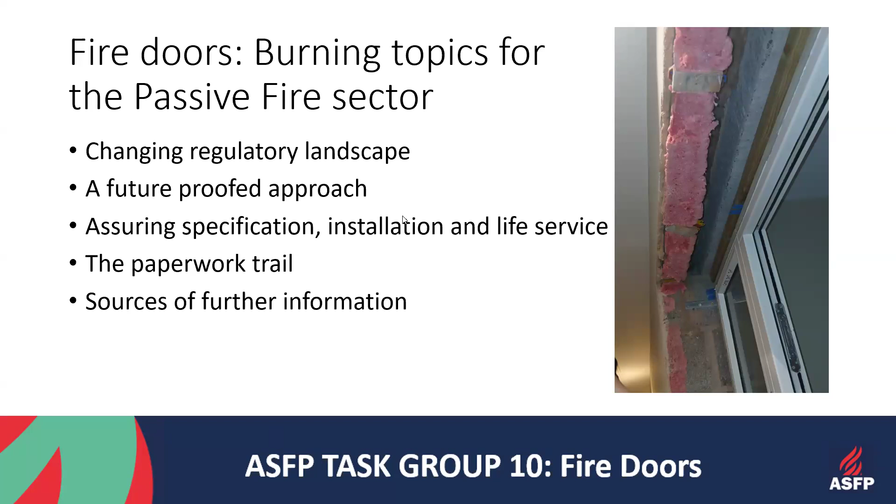And underpinning all of that work, we want to talk about the paperwork trail, the documentation that sits in the background, the due diligence checks that need to be done before any work is embarked upon. Now, I can't possibly tell you everything that I know about fire doors in the next 40 minutes, so I'm hoping to signpost you towards sources of further information that you may find useful to extend your knowledge after this webinar.

So before we get into the detail about fire doors and the passive fire safety sector, let's just take stock of the changing regulatory landscape that we're working within.

Relevant to fire doors is the removal of the national classes in 2029 from Approved Document B in England. We also have the Building Safety Act and the Building Safety Regulator emerging and are expecting secondary legislation later this year. The defined roles and the duties of the clients, the principal designers, the principal contractors and the subcontractors are becoming clearer.

Although fire doors have always been notifiable to building control, there seems to be a reawakening in this sector. And of course, competence seems to be the buzzword. How do we really assess and demonstrate the competence of organisations and operatives working within this sector? And then we have the pull on fire safety information, including information about fire doors within a building. And Regulation 10, the regular inspection of doors in the common areas, including apartment front doors.

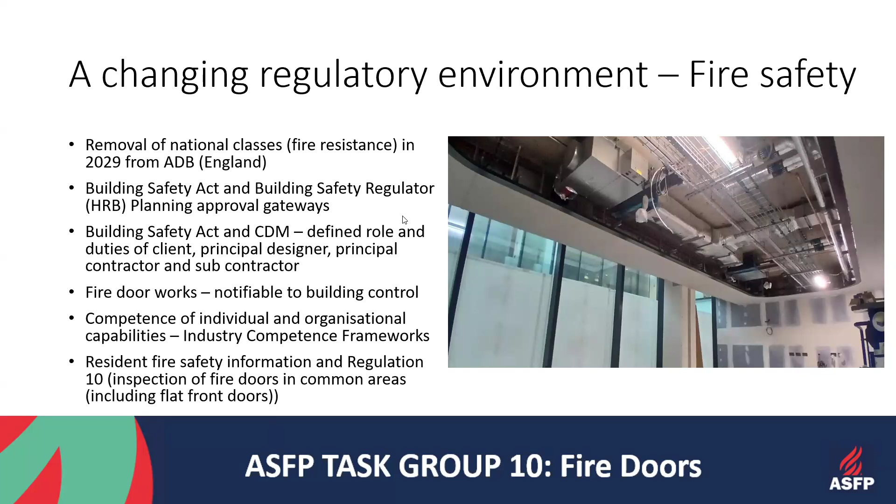Now, I'd just like to show you a simplified graphic of the way that products and information travel through the fire door sector. I'm not going to read my way through this entire slide. You can do that. But really, I'd like to illustrate to you how many different points in the process, how many different stakeholders are involved, and how many different places things can go wrong.

When you start a project and you actually start considering it from the perspective of the audience, the different stakeholders that are going to need access to your decisions, to your work, to your documentation, it's really important to consider all of these different groups and the type of information that they'll need.

And one group I'd like to give an extra special shout out to is the end users, the residents, the visitors, the emergency services that will attend that building throughout its lifetime and keep it safe. They are often a forgotten group when we consider the fire door sector, but they should be first and foremost in our thoughts.

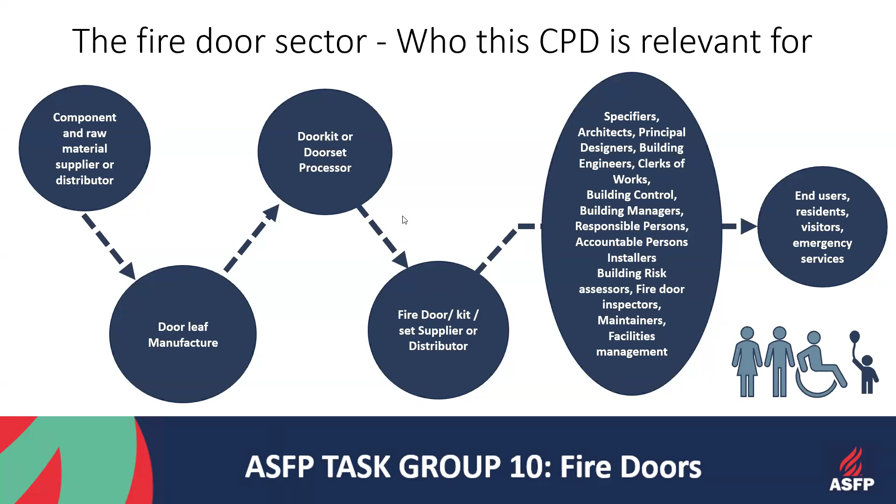Now, what I just showed you was a really simplified view of the fire door sector. Here's a little bit of an image that I did for a specific piece of work some years ago when I was tracing product. Now, there'll be no test on this slide, but I've included it to illustrate to you what a complex and intermingled web the fire door sector is.

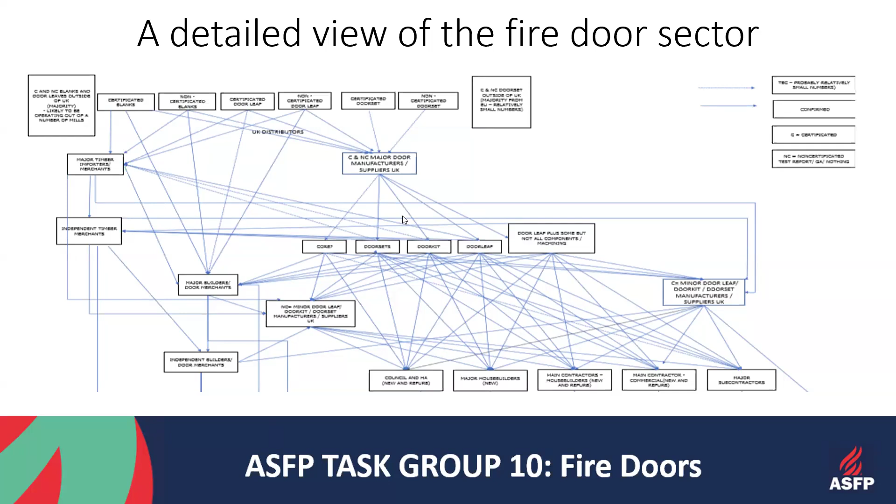Products and components travel in all different directions, with all different sorts of servicing being done to them by all different sorts of stakeholders and at many levels of the chain. When we consider this image and we consider it against the backdrop of documentation that supports a product in its lifetime while it's fitted into a building, we must be considerate of all the different stages that that documentation and product may have passed through before it got to that building.

Much of the information in today's webinar is based around commonly found fire door scenarios in both residential and some commercial settings. I'm talking about some of those more interesting buildings, maybe where we've got mixed use, a mix of retail, for instance, but with sleeping accommodation. I'm starting to add in some aspects here that contribute to the overall risk profile of the building.

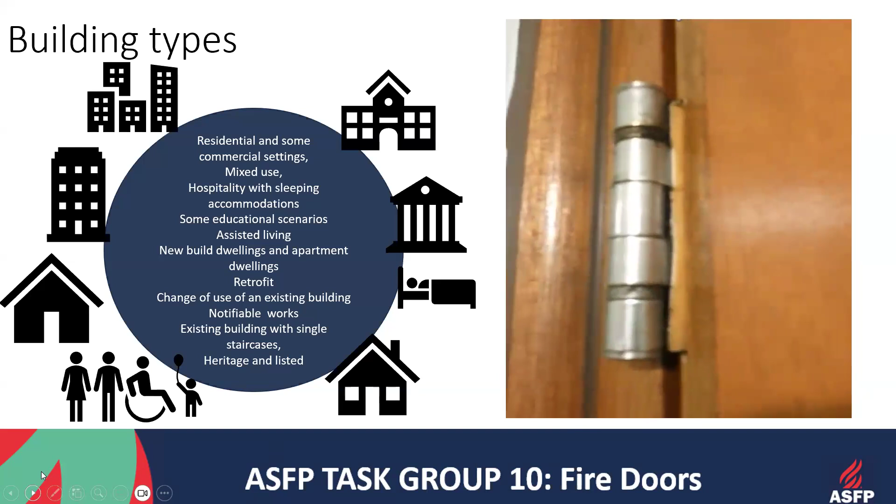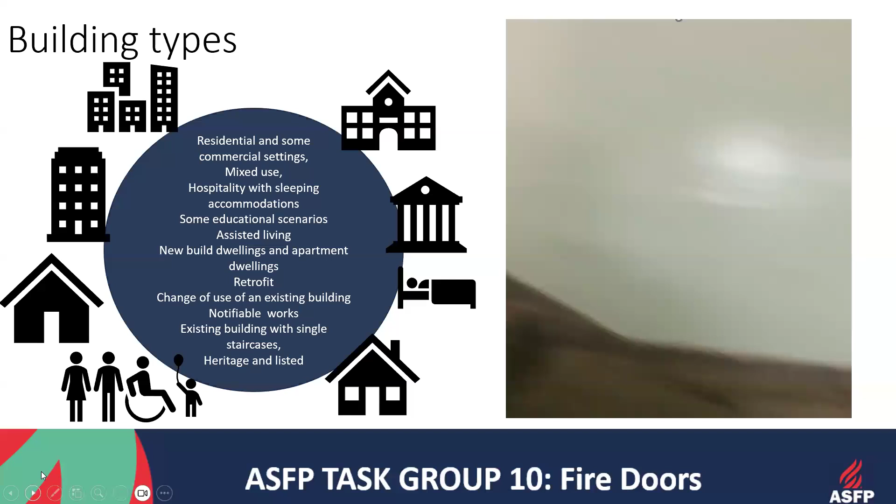Carrying on that theme of sleeping accommodation, we could be thinking about some educational scenarios or assisted living accommodations. It's important to note that the approach in a new building versus an existing building can be completely different. In an existing building, there may be a number of factors that need to be considered over and above the complications that you would deal with if you were just working in a new build type property.

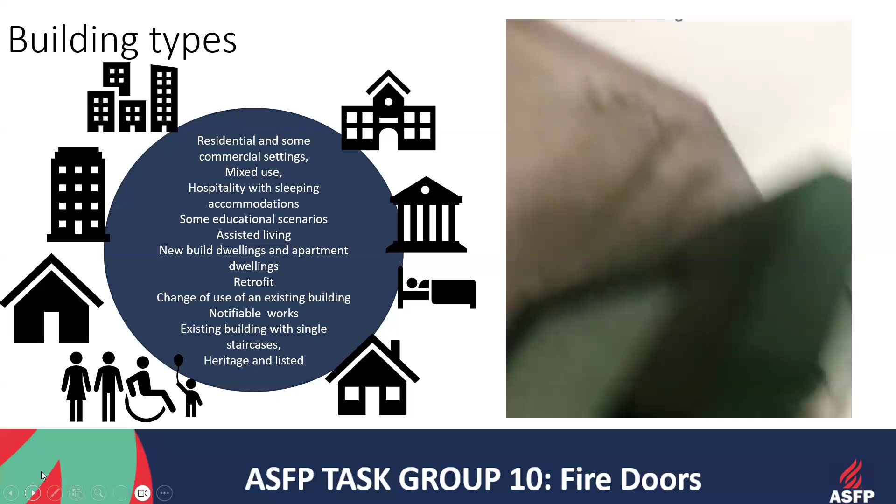As we've previously mentioned, changing fire doors and the passive fire protection measures in a building are notifiable to building control. In this presentation, we haven't got time to delve into the heritage or listed type buildings and the approach to fire door safety in them. These are some of the most amazing projects to work on, but often they are dealt with on a case-by-case basis.

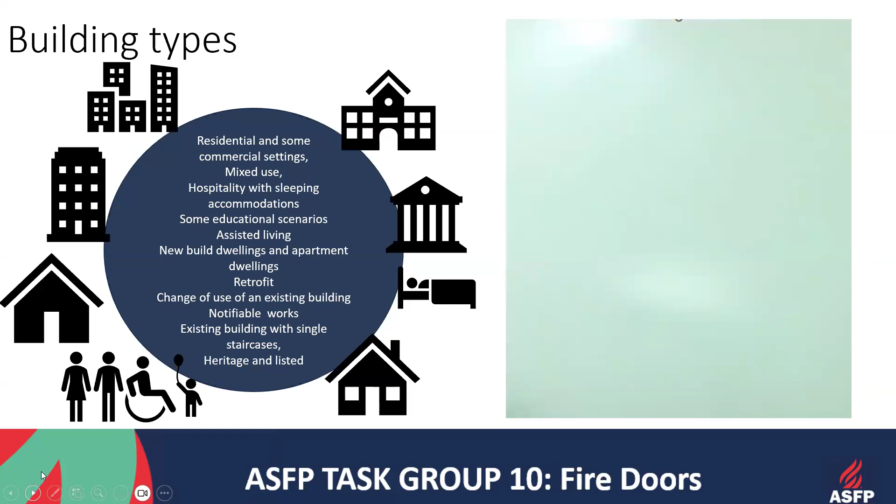So in this first part of the presentation, we want to express some foundation information about fire doors. In the first case, what's their purpose? What do they do in an emergency? Fire doors are part of the passive fire protection compartmentation measures within a building.

They're designed to delay the spread of fire and smoke and toxic gases around a building for a number of reasons. Number one, to keep the fire and the smoke in one place for as long as possible. Number two, to create safe evacuation routes such as corridors or stairwells where occupants of the building may escape from the building.

Fire doors are also used to create refuges in buildings. In some buildings, you might have a very complex design, or a risk profile of occupant that would make it very, very difficult to do a safe and quick evacuation. In those types of buildings, you may find a stay-put fire plan. The creation of safe refuges within the building for those that cannot self-evacuate is all important until the fire can be brought under control.

So we've talked about delaying the spread of fire, smoke and toxic gases. We've talked about creating refuges for those that can't self-evacuate. We've talked about keeping the escape routes clear for those occupants evacuating from the building, including the corridors and the stairwells. But one very important factor, which is often overlooked, is that fire doors also keep the routes of ingress into the building safe for the emergency services who come to our aid when a fire breaks out.

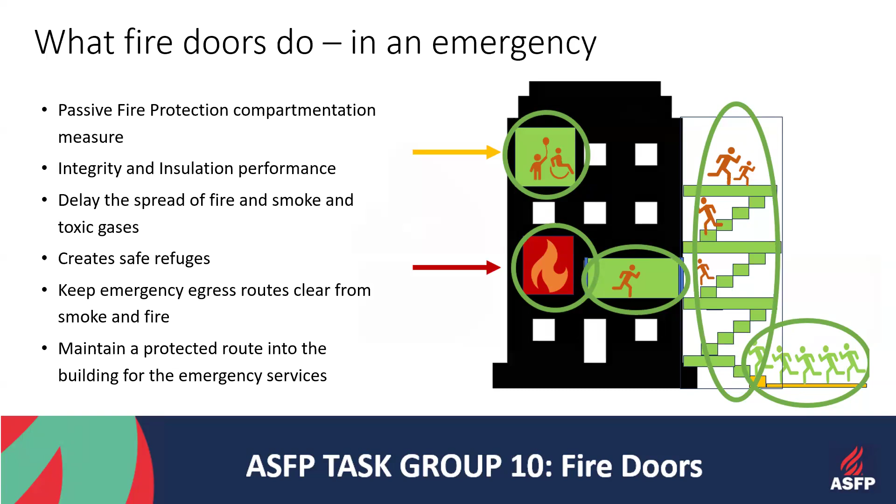But it is so important not to regard the performance of a fire door just in the emergency of a fire. Doors provide multiple performance characteristics. This could be the thermal performance, privacy, the security and safety of property and people. There are some elements of fire door specification that are key to functionality: the accessibility attributes, the acoustic protection, the safety in use and communication attributes that fire doors can also offer.

Now, all of these other performance characteristics—and by the way, this isn't an exhaustive list—need to be considered in a holistic manner alongside the fire and smoke leakage performance attributes of the product. To consider one performance characteristic above another, or at the cost of another, will be detrimental. The design and specification of fire door products should take a holistic approach, accounting for all the required performance characteristics.

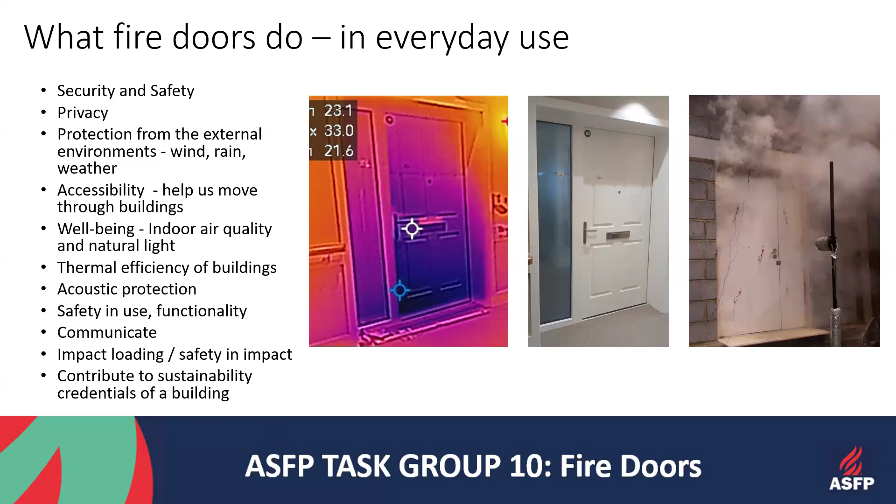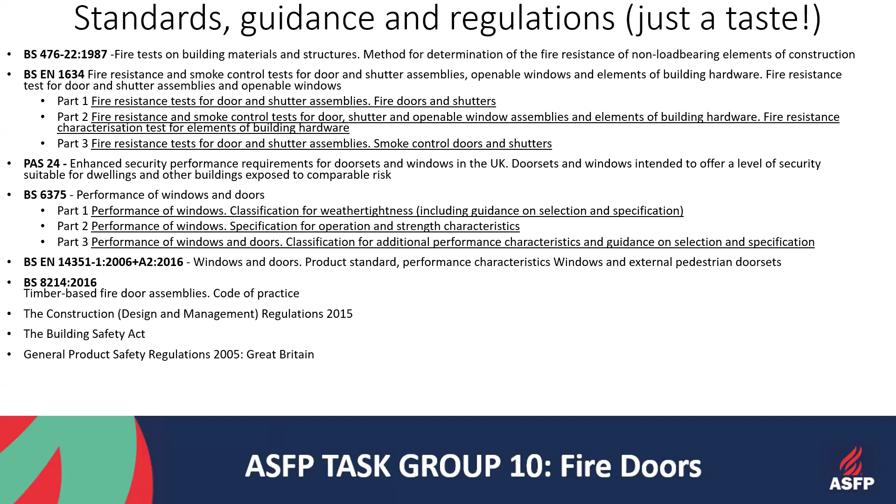The previous slide was just a taste of some of the guidance and standards that exist in the fire door sector. But I thought it might be useful to highlight that for external fire door sets, a harmonised standard has been published, so they may be CE marked or UKCA marked under the construction product regulation. We'd expect product to be presented to the market with a declaration of performance detailing its performance attributes.

Remember, we're dealing with multiple essential characteristics here: fire integrity, fire insulation, the ability to self-close, ambient smoke leakage, thermal transmittance, acoustic performance, etc.

We'd also expect these products to be accompanied by on-product marking, which would probably include a summary of the performance characteristics and attributes the product could deliver. In the background, we'd expect to see a certificate of constancy of performance from the manufacturer, confirming they have the controls in place to consistently manufacture the specification again and again.

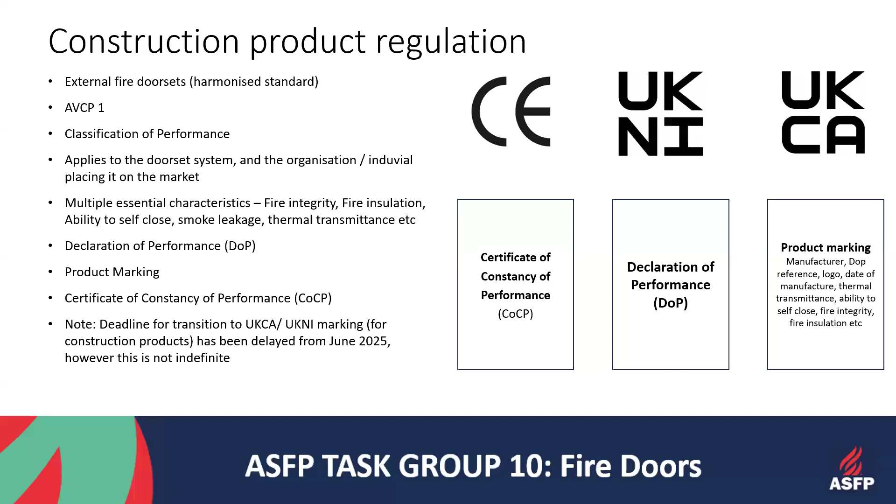And just a point of information: the transition to UKCA mark or UKNI mark from CE marking was due to expire in June 2025. This date has been delayed further, however we understand it is not indefinite, so we are closely watching this space.

On the previous slide we started to talk about how products are presented to the market. On this slide, I thought it was useful to pull out three key terms for you: the test report, an assessment, and third-party certification. All these things are different, and unfortunately we often see these words being used interchangeably.

So the first one, the test report. This is literally the documentation of turning up at a test laboratory one day and passing or failing a test. In essence, it's a snapshot in time. It doesn't really show that a manufacturer could return to their factory production facility and produce a consistent specification of product again and again.

However, primary test evidence is important because it helps build an assessed scope that will be allowed. Now moving to assessments. Assessments are done in a number of different ways - it can be expert judgment, or to a set of agreed extended application rules, EXAP rules. However, assessments are used to extend the scope of what has been tested. To carry out an assessment, it must be based upon primary and secondary test evidence tested on a robustly sampled product. Assessments are a technical justification based on test evidence and potentially empirical knowledge within the sector.

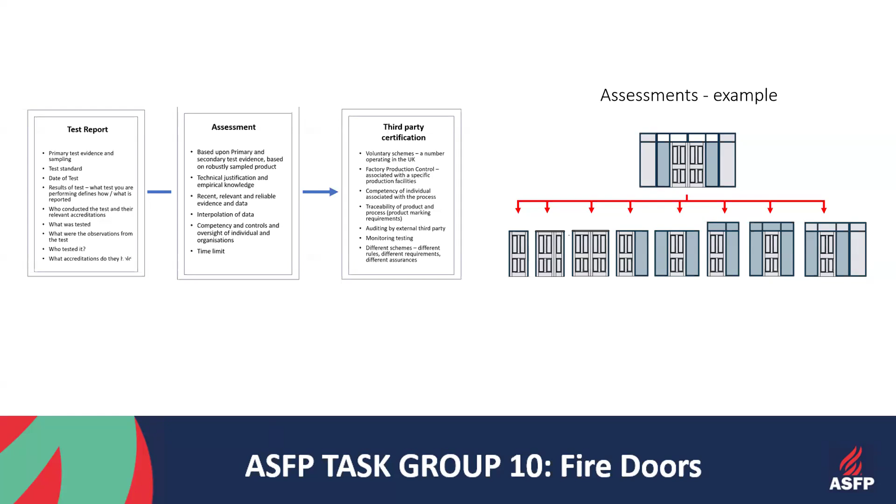So as you can see, depending on the scenario, product traceability can offer more or less. It's important to consider product traceability and the controls that you will put in place, which are often complemented by some of this on-product labelling.

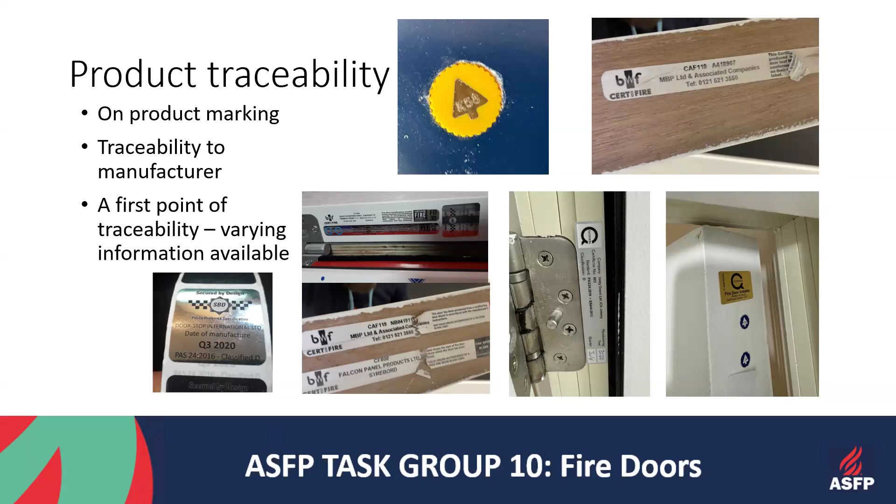These are just some of the information that will sit in the background and should be made available to stakeholders so that they can verify a performance claim of a product and also make an informed decision.

If you read through all of these different pieces of information, you'll probably note that they are all coming from different sources. So it's important to do the due diligence stages at the beginning of a project, before any selection or decision is made, to ensure that you have got a full picture of the requirements and that you can meet those requirements.

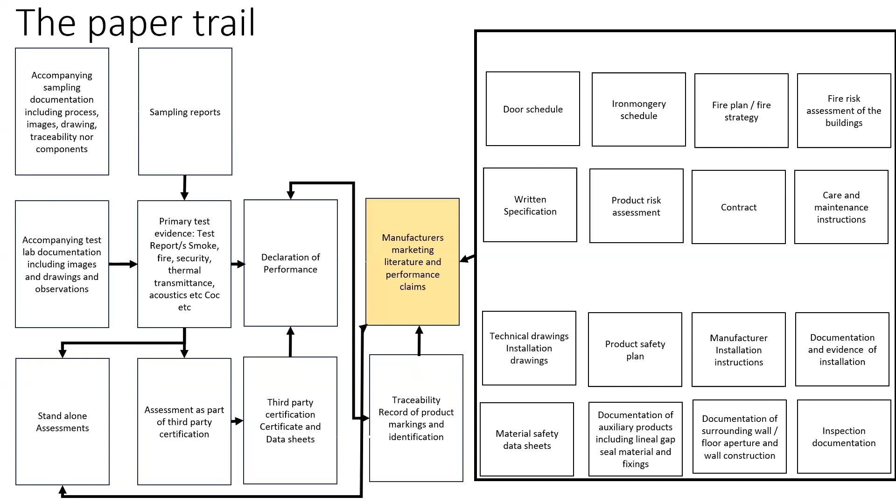Right, excellent. We've got through the first part of this webinar, the foundation information that I thought would be useful to those working in the passive fire safety sector. In this next part of the presentation, section 2, I'd like to take you through a holistic approach, the considerations, the approach, the different stakeholders involved, the different decisions made, and the different pieces of documentation that will help support those decisions.

In this next section, we were really minded that the listeners of this webinar may be working in a load of different scenarios within buildings. It could be new buildings, it could be existing buildings. It could be in a scenario of monitoring an existing fire door building stock, regular interval inspection, emergency replacements. They may be working in a context of providing identification for the products installed within a building, or creating and delivering the maintenance or upgrade plans required to bring these up to code.

In other scenarios, operatives may be undertaking other passive fire protection works, such as running services through buildings or updating other elements of the building fabric that could have an impact on fire door safety within a building as well.

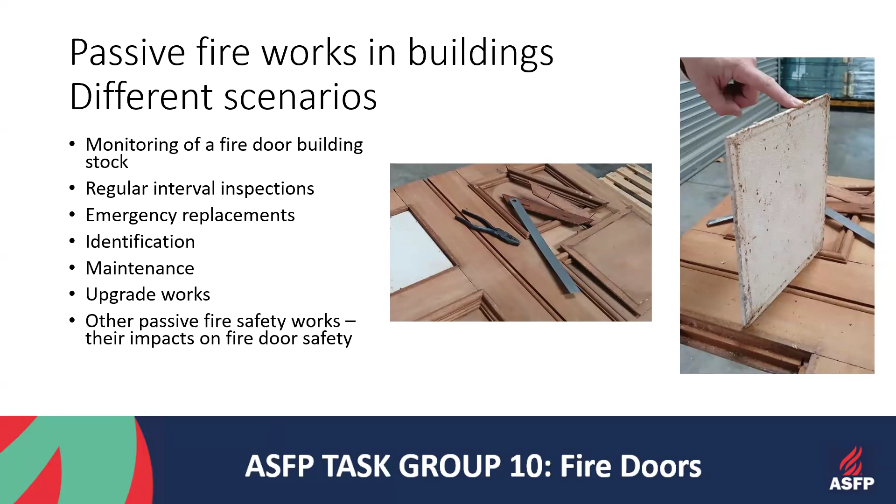On projects where the fire doors are viewed too much in isolation, in my experience, I have seen blinkered decisions being made, potentially with impact to other measures within the building.

Another point which is important is to consider the intended building type and the intended use, even down to the specific location within a building. For example, a cross-corridor door is a fundamentally different product than a locked service cupboard door, and again, that's fundamentally different from a fire door you may have on your kitchen within an apartment. Understanding the intended use and location can help you scratch the surface to understand how the building is operating as a total system.

It will also allow you to make informed decisions should you need to do upgrade, maintenance or replacement works. We talked about multiple performance characteristics previously, but at these early stages of the project, consider them all. There is not one performance characteristic that should take precedence over another. Consider them all and come up with a specification that truly answers the requirements.

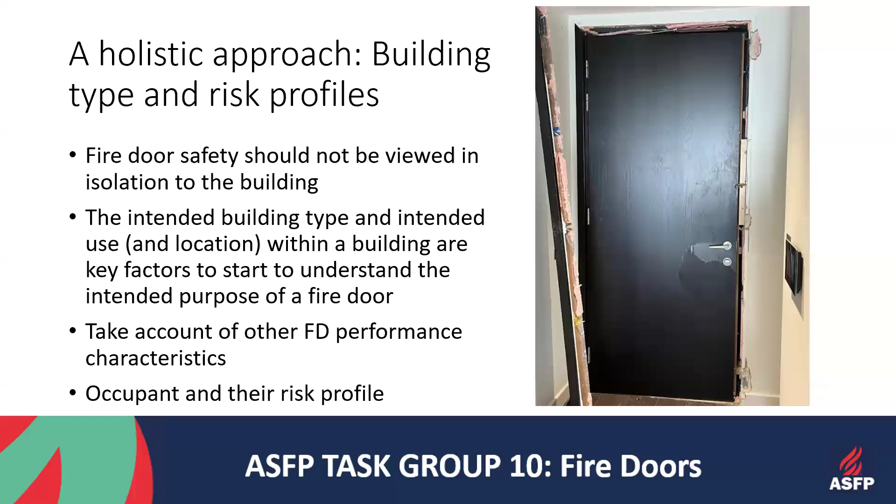Now, when we were creating this webinar, we were conscious that the listeners may be coming from all different sectors of the passive fire protection world. But this guidance, we hope it's useful, and it doesn't matter which scenario you're playing in. We'd like to talk first about the collection of data.

In whichever scenario you're working within a building, whether it be inspection, installation, maintenance works, upgrade works or change of use, the collection of data is key. This is a key stage that should take place before anybody steps on site and starts to carry out any physical work. It's this collection of data which can inform the scope of works and the planning and controls needed to deliver and execute a successful project.

Now, in existing buildings, this could be quite an onerous procedure. We need to locate existing sources of data, which could include the specification of the product already there, the way it was installed, the materials or methods. But in essence, it may be looking even further than that. We may want to reference different documentation such as the fire risk assessment for the building, the fire strategy, or the compartment drawings. We may be looking for the fire door history, the age, the product identification, and the maintenance recordings.

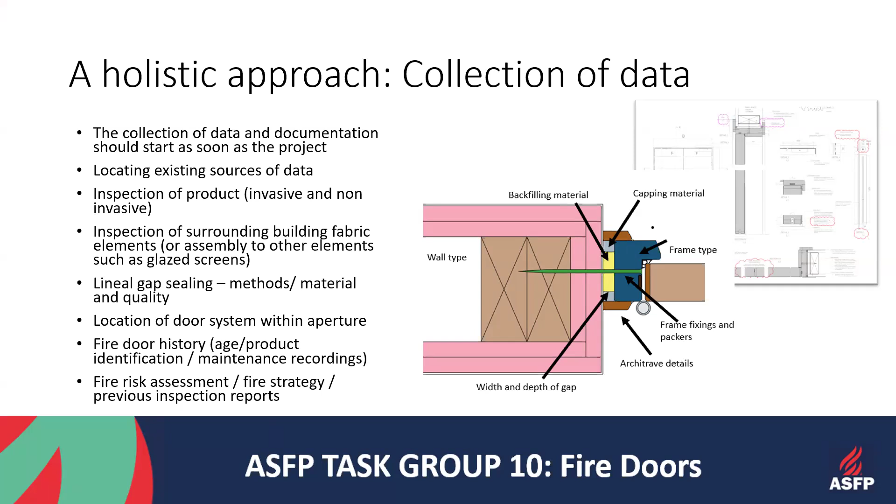Just before we move on, let's stick with this subject of the collection of data and consider the value of invasive inspections, particularly in existing buildings. To carry out only visual inspections can be somewhat limiting, particularly if you are considering how different compartmentation is maintained within the building. It's often in these scenarios that the time paid to carry out small invasive inspections of the building can pay off later, as it will allow you to properly plan and account for the works being proposed.

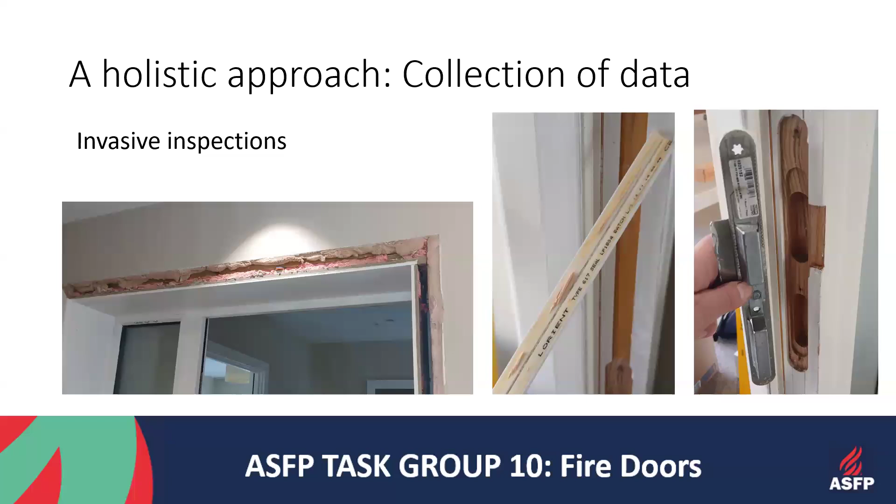One of the very first stages of a project should be about stakeholder engagement and considering how you will approach this. When we talk about stakeholders, cast your mind back to that chain of stakeholders we talked about in section 1, many of them with different needs, different requirements, and different timings that they will participate in decisions. You should consider a multidisciplinary stakeholder team to deliver the range of competences and specialisms that may be required for each of the projects that you deal with.

You should consider that the roles and responsibilities of these individuals should be clearly defined and laid out in a plan of decision making and sign off, with everyone clear about the timing of decisions and who is responsible for making them within the project team.

And just a point here, in existing buildings, this stakeholder engagement should include the residents' voice at the earliest possible stages to ensure that the most suitable and satisfactory undertaking of works can be done. Consider the different communication methods you'll need and the different types of information that will need to be made available to the different stakeholders at each different stage of the process.

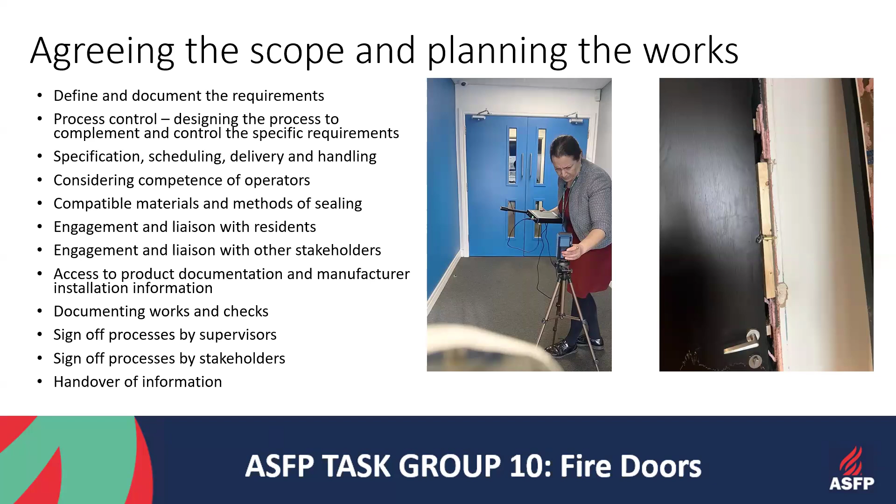At these very early stages of the project, you should already be considering and formulating the list of handover information that will be required at the end of a project. Once the scope of work has been agreed, the project detailed planned, and the competence of those involved confirmed, you can undertake the works in the building. But I'd like to highlight the importance of documenting the work, creating the living record that will contribute to the golden thread of building safety information after the works are completed.

Now, for each different project, the different documentation and checks that may be required can differ, but this should be planned out early depending on the scope of the works. A few important points that I'll call out on this slide: considering the specification of product, the scheduling, the delivery, the handling requirements, the contingencies which need to be built in there, the competence of the operators, and whether any specific training needs to be undertaken regarding the specific process or works being undertaken on a particular project.

How you've engaged and liaised with the residents and what are the contingencies there. How can you access product information and manufacturer installation information up front? And the sign-off processes.

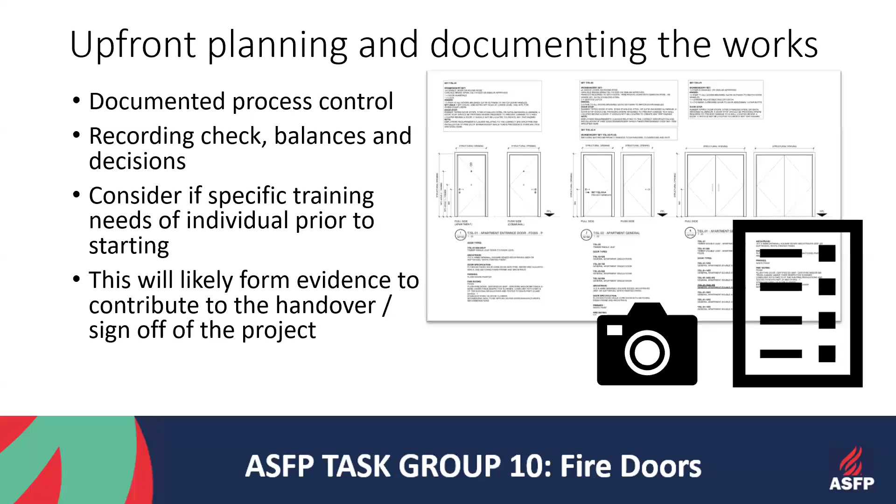Now, the handover of information should come as no surprise to anyone working on a passive fire protection or fire door project. Handover of information is key to enable the product to be serviced, maintained, and looked after throughout its life service. Knowledge about the fire door protection measures within a building are critical, knowing how to report concerns, mitigate them before they become a really huge problem, and actually save money.

The planning of the handover of information should start at the very early stages of the project, considering all of the different stakeholders and what information they'll need. How will that information be accessible, be secure, not just now, but in a few years' time? And consider the audience receiving the information.

We talk about fire doors every day, but some may not be so familiar. Some information really needs to be tailored to optimize the communication and comprehension by stakeholders.

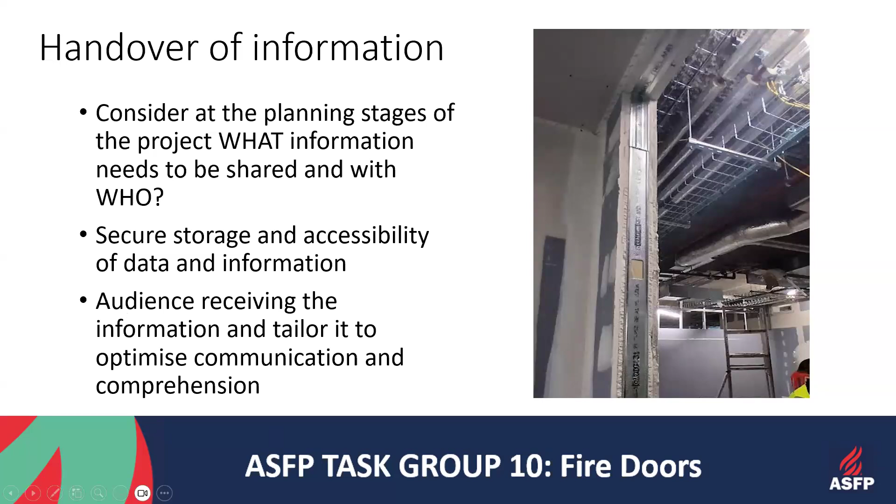And just before we sign off for today, let's touch upon the competence of individuals and the capabilities of the organisations involved in passive fire protection works. Within our sector, we are seeing the emergence of competence frameworks for individuals. These are tailored by different processes, tasks, functions and activities that an individual may undertake, and consider the different ways that they may demonstrate them, the essential magic mix of skills, knowledge, experiences and behaviours.

The ASFP would encourage our stakeholders to get involved in the competence framework conversations and make use of some of the freely available resources, such as the Competence Framework, which is hosted on the ASFP website. It's a free library of information, not just available to our members, but to our wider stakeholder network as well, full of useful information about how to bring and scale the competence conversation to your organisation and your individual role.

For those working on passive fire protection projects or fire door safety works within a building, it is also important to consider the competence of the individuals and operators that are going to be involved in your projects. These should be intrinsically linked to the roles, the responsibility and the decision-making capabilities of those individuals to ensure that they can demonstrate the right skills, knowledge, magic mix of experience and behaviours that are required to deliver success and safety in this space.

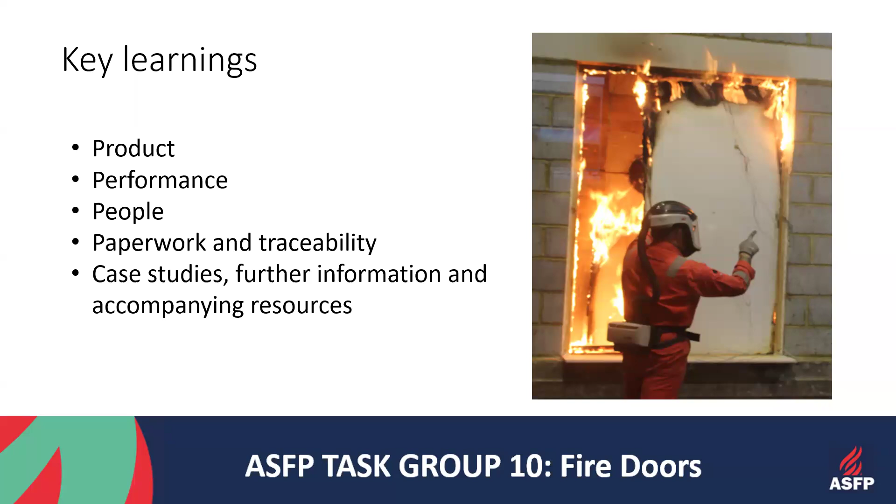So key learnings around product from today. Consider those performance characteristics and consider it in a 360-degree holistic view. Early engagement with the supply chain, your multidisciplinary stakeholder group of those that will probably contribute information and decisions to a fire door safety project within a building. Think about those up front and avoid the costly delays later on.

Ensure that you allow the time within your project to carry out the due diligence, the deep dive searches for data that will support your decisions. Don't be complacent, don't assume anything, and always check specification and the associated paperwork.

Unintended consequences. Look both ways, particularly when dealing in unfamiliar buildings or those that have got a complex risk profile.

Product traceability. We spoke about on-product traceability markings, but traceability of product and process goes so much further. In planning any project, you should be considering the traceability attributes and the different scenarios where you may need to use traceability to inform your decisions and how you would get your hands upon that data quickly.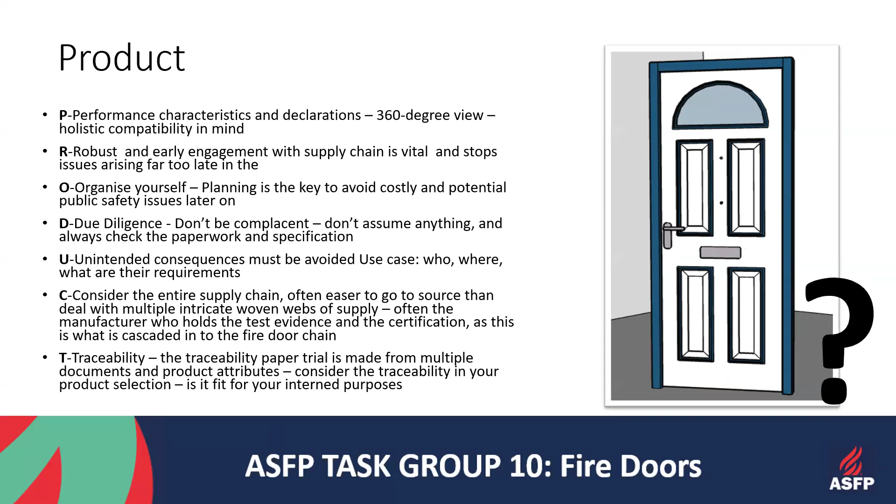All too often, I have seen one performance characteristic take precedence over another when we consider a fire door. This is a really, really dangerous approach. There is no hierarchy of performance characteristics.

There is, however, a lot of work that can be done up front to deep dive into the requirements and the specification to meet the intended purpose, to place a product in a building that is fit for purpose for the specific use. I won't read my way through all of these performance characteristics, but I'd like the key learning from this slide to be: consider these points holistically and don't just go after one at the great cost of another.

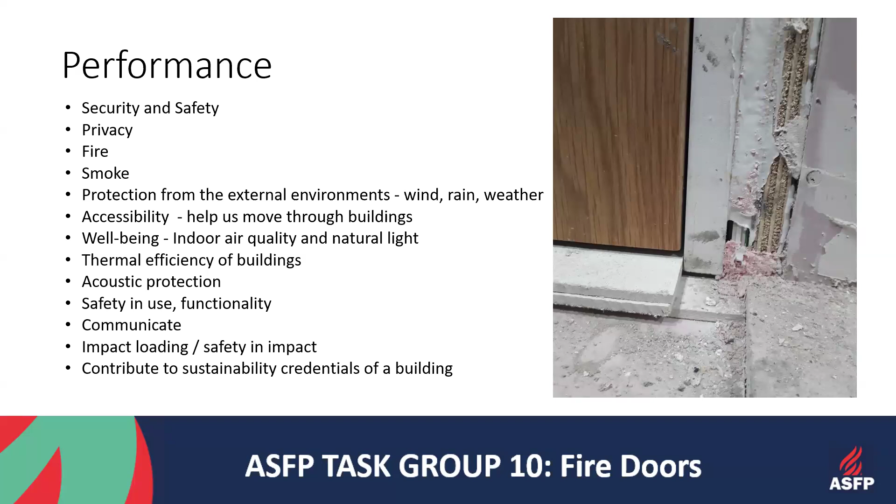And now for one of the most important facets of managing fire door safety, considering the people. So considering and understanding the requirements of the end users within a building is critical, not just getting specification right on new product, but in helping you to design

works in existing buildings, whether they be upgrade, maintenance, or replacement works. The last thing that you want to do is spend the money and the time carrying out works that are then proved to not be fit for purpose to meet the requirements of the end users in the building.

At the beginning of your projects, you should also be considering how you would engage and the preferred communication methods for the different stakeholder groups. Consider your residents' engagement plan and the feedback loop processes and continuous improvement processes that you want to have embedded in your process. The method of reporting concerns will be extremely important to end users of the building, and the information from an education and awareness perspective that they would need as well.

And just a final sign off to that paperwork trail that underpins almost every decision that we make. The paperwork collection and recording and documentation starts very early in the project, and time needs to be built into a project to be able to do this exercise.

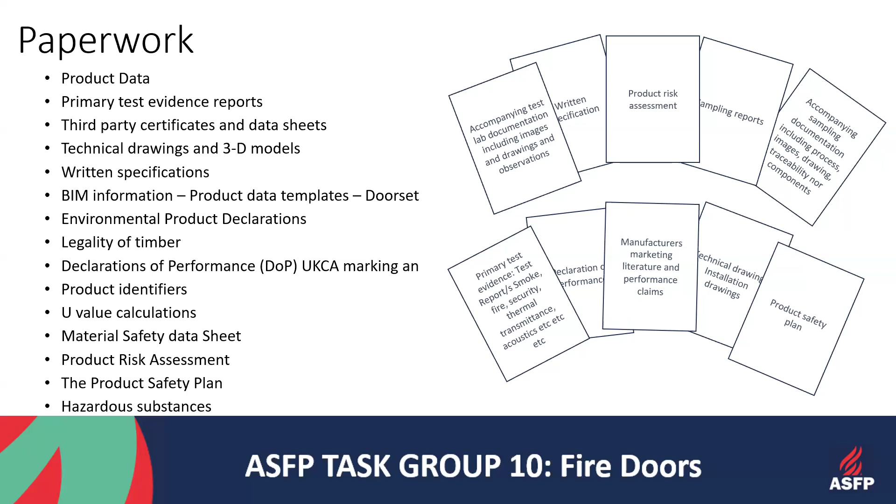So before we finish today, I would like to introduce you to a case study to illustrate some of the themes that we've talked about today. Although this case study happened a number of years ago, it is an example of how things can really go wrong when the passive fire protection measures in a building are not maintained or thought about.

As I said, it would be impossible for me to tell you everything that I know about fire doors in just these 40 minutes. So I would also like to signpost you towards sources of further information and guidance before we go into our Q&A session.

In July of 2009, a small fire started in Lakanal House. Lakanal House was an 14-storey building in Southwark in London that was built in the 1960s and contained around 100 flats.

The building layout was interesting, complex, some might say. However, what started as a small fire that should have been put out very, very quickly turned into something that was completely out of control.

In little under 2 hours, 6 lives had been lost and the building mostly destroyed.

Fire doors are really complex products, and depending on where you're working or applying them, the complexity can just multiply. We hope that this presentation today has provided some level of basis foundation information to highlight some of the considerations you should undertake prior to approaching any work in any building.

Much of the hard work done up front to plan a project will lead to successful execution when it comes to it. We'd like to signpost you towards the Green Book Fire Door Systems, coming out later this year, which is also accompanied by a number of playbooks tailored to meet the needs of different roles and individuals working within this sector.

We also have a number of resources on the ASFP website, including the Competence Framework, a free library of competence resources designed to be made available to improve and continuously update competence levels within this sector.